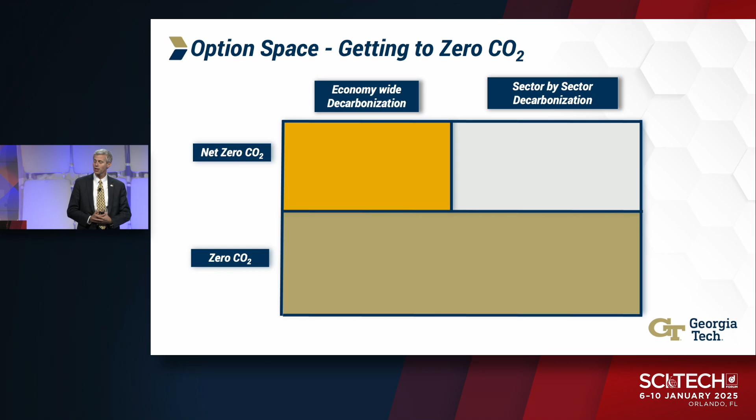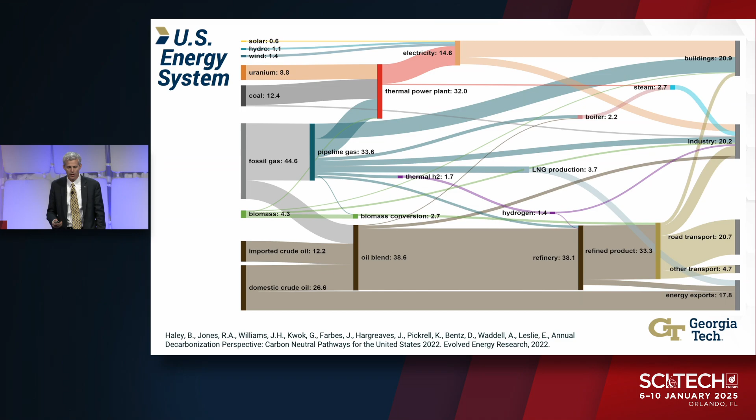If you want to think about where the commercial aviation sector fits, it's in that box right there, other transport. About two-thirds of other transport is aviation.

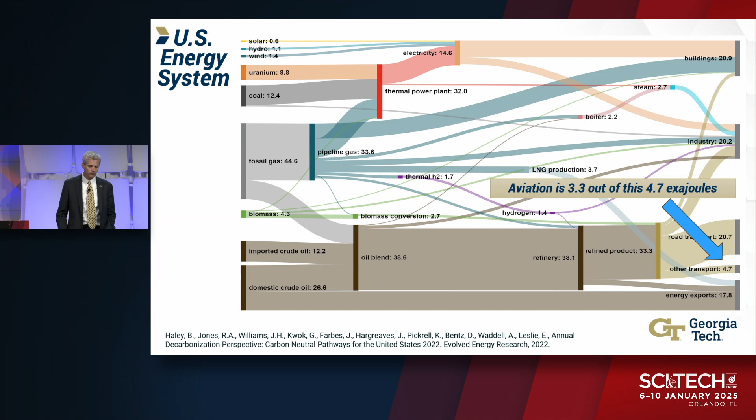So just a couple quick comments. If you wanted to sit back, squint, and ask what are the big buckets—what is this thing if you reduce some of the spaghetti? Again, we have energy sources on the far left and energy users on the far right. It's very important to emphasize there's another multi-trillion-dollar sector, which is how we're moving energy around—the energy carriers and energy storage systems that make this thing work.

We have two major energy carriers. One of those is electricity. One of those is fuels, lots of different energy sources. And if you want to just fill in rough numbers of the U.S. energy system today, these are the numbers. You can see far and away fossil fuels is the biggest source of both where energy is ultimately sourced from, roughly 90%, but also the way in which we move energy around and also the way in which we store energy—the Strategic Petroleum Reserve, the natural gas pipeline system, 2 million miles of natural gas pipelines, a massive battery, right?

Fossil fuels are actually doing a lot else. The reason the numbers are different on the left and right side for fossils is just thermal conversion efficiencies. But what you can see is that roughly we're running in an 80-20 split with the current U.S. energy economy as a whole, which means that we use fossil fuels roughly as 80% of the means by which we move energy around and store it.

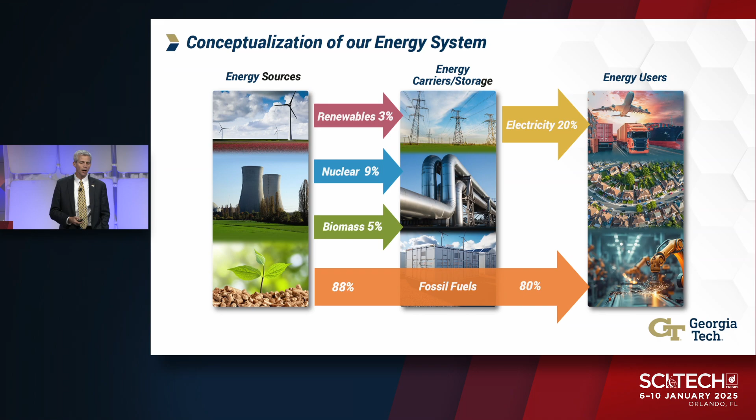And we use electricity as our carrier for the other 20%. So just a couple comments about that. First of all, it's somewhat obvious, but I want to emphasize it: these are multi-trillion-dollar sectors. As we're thinking about the evolution, it's important to recognize the interconnectedness of all this. For example, the aviation sector is leveraging, is contributing technologically to, but also benefiting from infrastructure of huge existing industrial sectors—oil pipelines, an oil refining industry, and so forth.

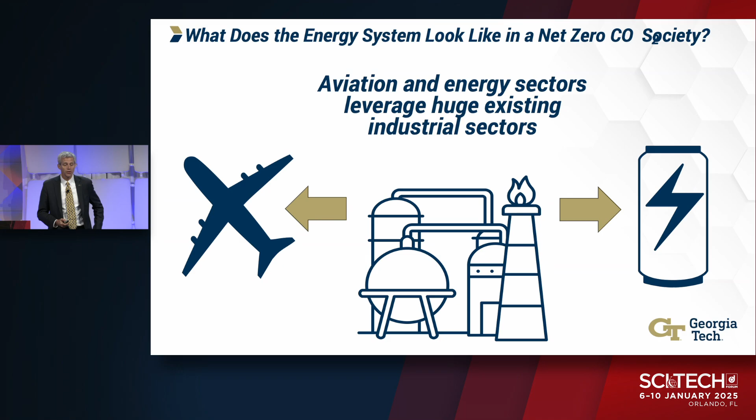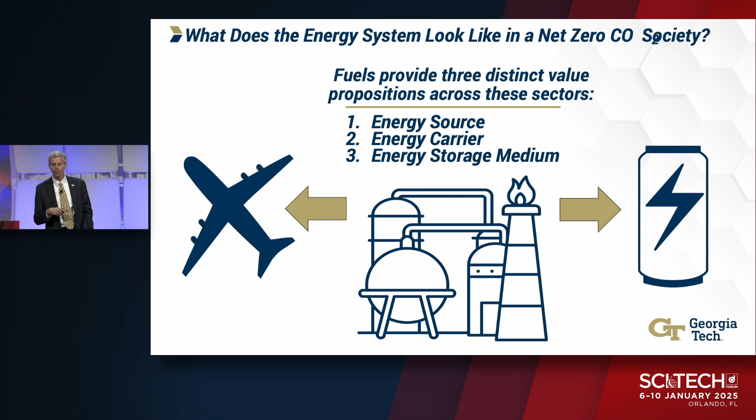The other piece, which I mentioned before, is we think about particularly the fuels, which is the biggest bar—90% of primary energy sources, 80% of carriers. Fuels aren't just energy sources; we're used to thinking of fuels as energy sources, but fuels are actually doing three things to our economy. They're energy sources, but they're also means of moving energy around—they're energy carriers—and they are also means of storing energy. So a very important point as we think about the future is that those three different value propositions are increasingly going to be separately differentiated, and they're becoming separately monetized.

So what do I mean by that? Today when you buy a gallon of gasoline, you're getting three things. You're getting something that stores all that energy—your car can sit there for a week, for a month, and it still has what it has. It provides the motive power to move your car. You're not used to thinking about what you're paying for the energy source part versus the energy storage part. But increasingly, those are going to be differentiated.

A simple example would be sustainable aviation fuel. The ultimate energy source might be solar energy. So your ultimate energy source could be solar, and then you would use a Fischer-Tropsch process, for instance, to make an e-fuel. That liquid fuel would then be your energy carrier and energy storage medium.

By separately monetized, what I mean is, again, when you buy a gallon of gas, you're buying a gallon of gas, but there are going to be different players along that spectrum making money in different ways. Increasingly, what we'll see is different technologies and systems competing for providing those services. You can have solar and wind as your primary energy source, or you can use fossil fuels with carbon capture as your primary energy source.

In terms of how do we store energy—well, you can use batteries, you can use compressed air, you can make a liquid fuel, you can make a gaseous fuel, you can make hydrogen. There are a lot of very interesting dynamics in this world as these different value propositions are becoming differentiated, as we're watching in real time.

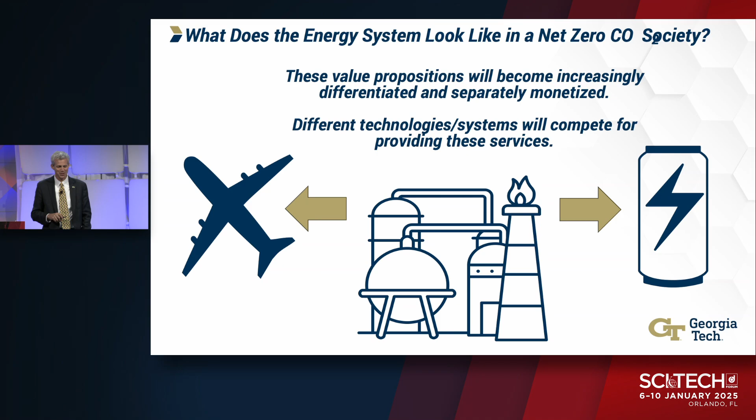Okay, so let's try to envision—and don't look at this diagram yet because I don't want you to be distracted, I should have had a transition slide—what might this world look like in a world where we've zeroed out our carbon emissions? What might this world look like?

So we can tackle this problem as engineers. In fact, there's a large community that exists today, macro energy systems modelers, that try to tackle this question. What they've done is a very sophisticated job of essentially modeling, let's just say we're talking about the United States, the US energy system. And this is like CFD. You can't just sort of average things out, right?

You have solar energy here, you have wind energy here, you have pipelines there, you have oil here, you have natural gas there. You have demand centers concentrated in cities. The stuff's all got to get connected. You got to do CFD not only in space, because where this stuff is and how it's getting moved around is spatially heterogeneous, but also in time because, in particular, in the electric power sector, you've got to make supply and demand match every instant of time.

So it doesn't matter if you've got a lot of power during the day when you need it at night. You need either a battery to move it from day to night, or you need a way of generating power at night. And so anyway, large communities are putting together these models that try to capture all of these features. And once you've got a reasonably high fidelity model of what this energy system looks like, you can then wrap an optimizer around it, right?

You can say, hey, this is what we have today. What would it look like to get me to some future state? And you can constrain it in different ways. For example, the way a lot of this optimization works is get me there in a least cost manner. So you have to have a model of cost, and obviously there's assumptions with all this stuff. You're modeling cost curves. You're modeling how fast solar and battery costs might drop, how big the biofuel resource is before you start really crimping food costs and things like that.

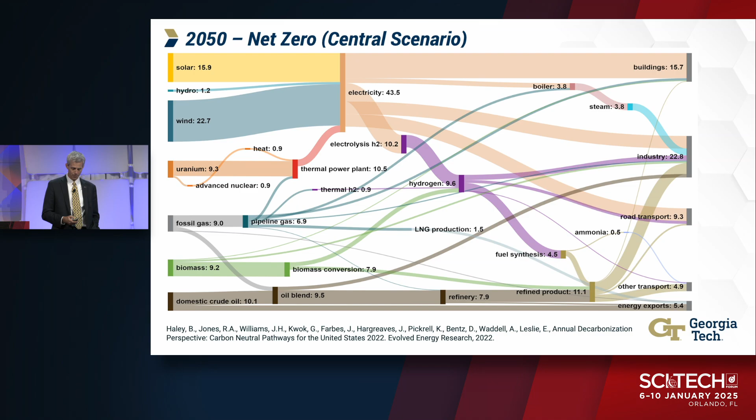On the right, you see your users, and then lots of stuff going on in the middle. You see a big purple hydrogen, which wasn't really there before. You see fuel synthesis, which is synthesized liquid fuels as opposed to using fossil fuel. You see ammonia, etc. So if you kind of squint and say, where is aviation on this? Well, aviation is about 3.1, about 2/3 of that other transport sector. Also very interesting is that the fuel split of this least cost model is not 100% SAF. It's 50-50, fossil fuels, renewable fuels.

If you want to say what's a least cost way for our society to get there, saying aviation should go net zero versus saying how should aviation best support a least cost societal net zero target, you end up at a very different answer. In particular, you're still burning. And it makes sense, because it's going to be a whole lot cheaper to manage your CO2 emissions from something sitting on the ground, potentially right above a depleted oil reservoir that you can just pump the CO2 back into, than trying to manage something that's flying around and has to deal with all the safety issues of aviation.

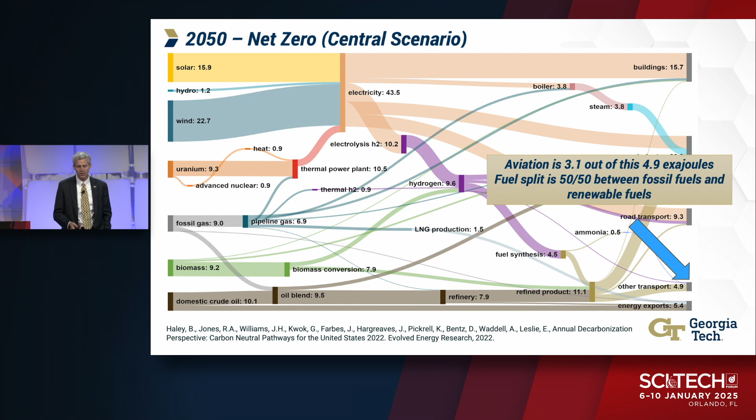But again, demonstrating my point that you get a very different answer if you think zero CO2 versus net zero CO2, and a very different answer if you think sector by sector decarbonization versus society as a whole. All right, so if you sit back and squint and say, okay, what are the macro numbers? Here's where they are. You see your energy sources on the left, so big growth in renewables, 55%, and big growth in biofuels, biomass there, but what you also see, like I said, fossil doesn't go away.

Fossil's still about 20% of primary energy sources, and then the whole idea is then you're utilizing other means to manage and capture, or go negative, essentially go negative carbon. On the right side, how is energy moving around? So remember, our current energy system is 80-20. 80% is moved via a fuel, 20% is moved via electricity.

You see this least cost world is a 50-50 world. 50% of energy is moving around via electricity, 50% via a fuel. So big growth in electrification, going from 20% to 50%. Lots of opportunities and technology needs and R&D around power electronics and high voltage motors and batteries and energy storage. That's motivated by that. But I want to again emphasize, it's not 100%.

And there are groups that are essentially saying that we need a 100% electricity world where fuels aren't utilized at all. And that is a possible world. You can do that. It's just a lot more expensive. And so this least cost world is a world where it's 50-50. What's also interesting about this 50% fuels is it's further split. Half of it is fossil. The other half is synthetic fuels, fuels that you manufacture: hydrogen, sustainable aviation fuels, ammonia, et cetera.

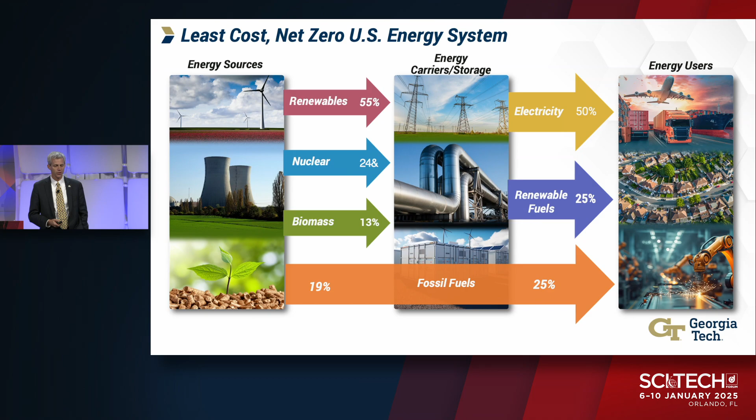And so a very large new sector, I won't say completely new, but in terms of getting there, for this renewable fuel sector. So that's the United States. So I've shown this to a few international communities and they're like, okay, whatever. This is the world. So this is a model, some of the more recent numbers from the International Energy Agency, IEA, where they've tried to do something similar, where they, again, grid up all the different countries and map these things out.

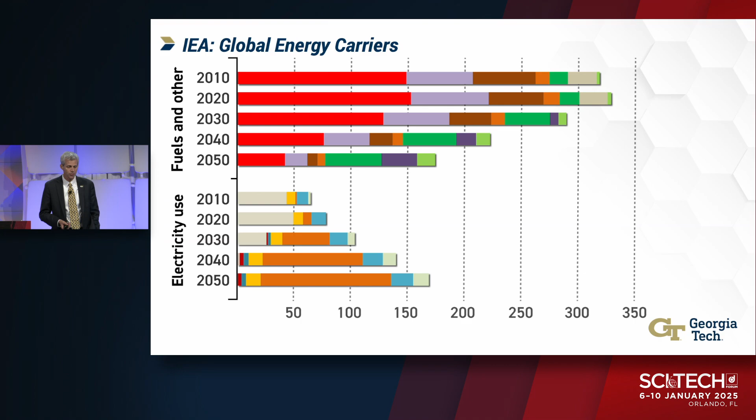And what you see here is the top set of bars is fuels. The bottom is electricity use. It shows current numbers, 2010. And you see this split between electricity and fuels. But if you flash forward to 2050, again, this least cost world, you see those bars are about the same length. So equal contribution of fuels and electricity. But again, emphasizing that the role of fuels is changing. Significant reduction in the use of fuels as primary energy sources, and a world now where the primary value proposition of a fuel is a means of carrying and storing energy.

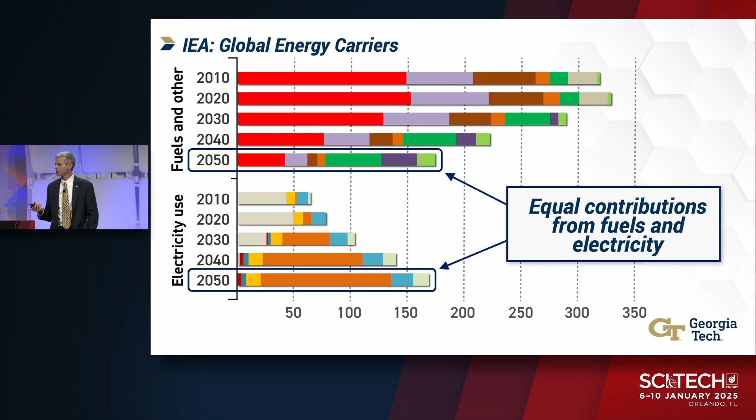All right. So this is my transition slide. So that was kind of my macro societal view. Let's think about what this might mean, and then I want to dive into the weeds on some specific technology problems. There's a lot of really interesting technology questions that pop out of this. And I'm going to emphasize some of the technology drivers in areas that many of you work in and that I work in. But first of all, things like thermal efficiency continue to matter a lot. The Brayton cycle, the rotating detonation engine, whatever it is.

If you just think about this world where 50% of the fuels are sourced synthetically, and I can tell you, as much as we're going to try to drive down costs of synthetically produced fuels, it's going to be really hard without a carbon tax to get it at parity to a fossil fuel. I'm just saying. We can have all these wonderful goals to try to get hydrogen or sustainable aviation fuels less expensive than a fossil. It's going to require policy levers, carbon taxes or tax credits or things like that.

But what that also means is there's going to continue to be a premium on thermal efficiency, potentially even a larger premium, where today the significant cost of operating an airline is the fuel, significant cost of operating an electric power utility is the fuel. And if we think about these fuel prices, thermal efficiency is super important. Operational flexibility, very, very important. And what I mean by this is the ability of your system to operate at low power, high power, operate with quick transients and things like that.

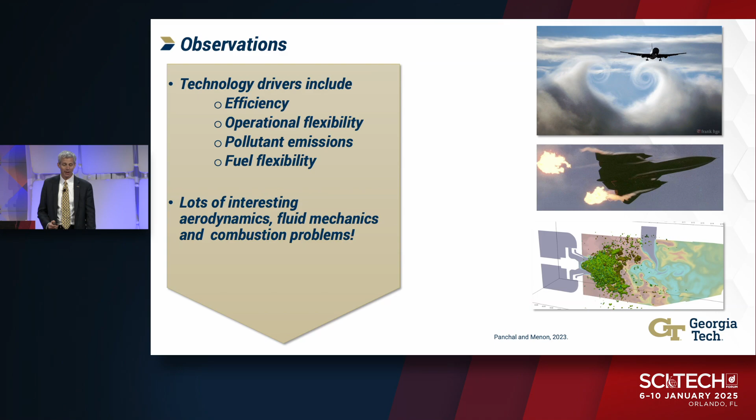So bottom line is, this is a world where there's a lot of really cool problems, and what I want to do in the rest of this talk is zero in on some of the work I've done, and drill down on some of these more detailed issues: fluid mechanics, some of the canonical problems in fluids, how combustion starts to influence those, and a whole other set of issues with flame dynamics and then combustor system dynamics.

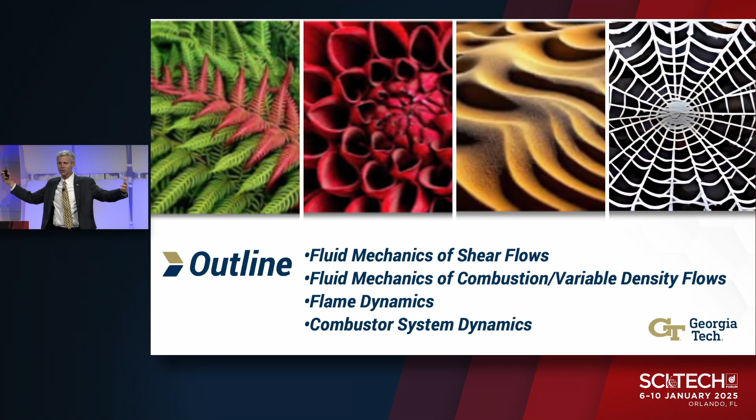The way I've structured the rest of this is to emphasize the way in which nature in our aerospace applications naturally likes to organize itself into really interesting patterns, which flow all the way up into system level issues around our overall emissions and climate impact. And again, there's lots of other problems that are really interesting and important.

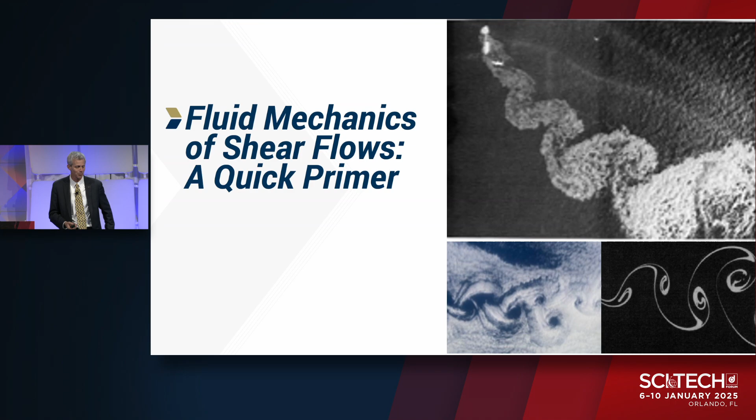I've just used ones which I'm most familiar with for the rest of this. So let me just quickly talk, as a quick primer, to remind ourselves of a couple things around fluid mechanics. And I want to talk about internal flows, like flows inside of a combustor, because that's what I can talk about with the easiest. And so on the left we have a mixing layer, in the middle we have a jet, and on the right we have a wake, all very important canonical geometries for internal flows.

And what I really want to talk about is vorticity. So the red overlay shows you where the vorticity is. Remember, vorticity is the velocity gradient. And it just shows you where the vorticity is in these flows. And where's this vorticity coming from? If we have a homogeneous uniform flow, you're not really making new vorticity in the flow. Rather, what's happening is vorticity is originating from all those no-slip boundary conditions, all those walls. And you're making vorticity, and then it's getting flushed into the flow.

And it's a little bit like if you imagine having a dye, a streak line, for instance, where you're just injecting a dye into the flow, and you say, what happens to that dye as it evolves? Well, if it's just a dye, a flow without any shear, nothing really interesting. It just convects downstream and it gradually diffuses. So essentially that far left image is a little bit like a dye. You're injecting vorticity into the flow, and what happens to that vorticity? Does it just go downstream and diffuse, or do more interesting things happen?

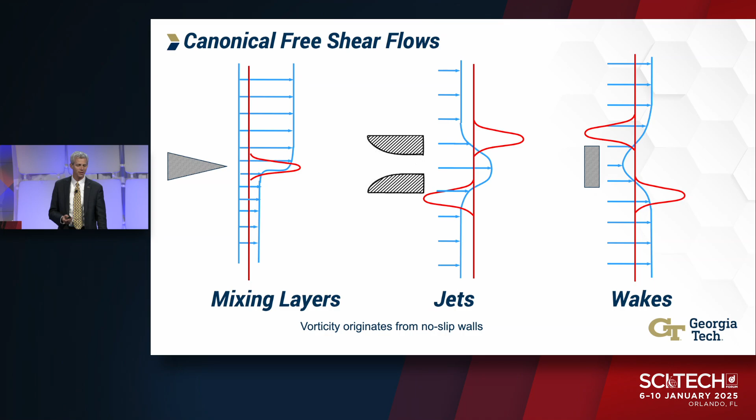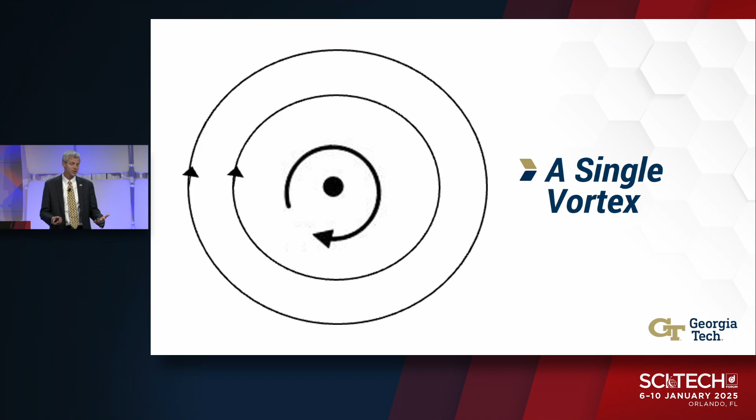Well, to answer that question, I want to talk a little bit about how vorticity interacts with itself. So if we start with a single vortex, here's what I have here. This black dot denotes a single vortex, and it just spins. That's what a single vortex does. But the moment you start getting multiple vortices, interesting things start to happen. So if I have two counter-rotating vortices, the right vortex is inducing a motion on the left one. It's pushing it down. The left vortex is inducing a motion on the right. It's pushing it down. So these two vortices are actually going to translate.

They're going to convect. So if you've ever taken a canoe paddle and been in the water, and you move the canoe paddle through the water, you will see this. You'll see those two vortices formed at the edges. If you lift your canoe paddle out of the water, you'll see those two vortices continue to translate and convect through this exact phenomenon. Well, all right, let's make this a little bit more interesting.

Suppose I take a linear array of co-rotating vortices. Each white dot here denotes an individual vortex, and I've just drawn a black line through them just so you can see how they're connected. And this problem is motivated, it's not the same thing, by this sort of shear layer profile here, where you have that jump in vorticity in the middle. Again, each one of these vortices is inducing a motion on each one of the other ones, and if you just leave it like this, it'll stay like this, and it'll just diffuse downstream and nothing interesting happens. But it turns out that this configuration is unstable.

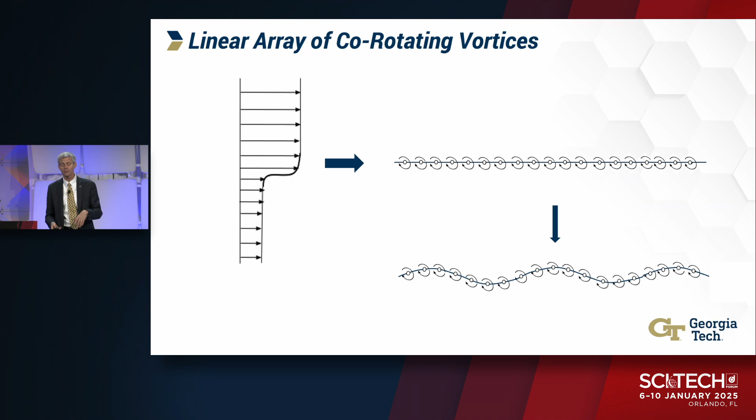So what happens if I just take these vortices and I perturb them a little bit? What happens to these things? How does it influence how they interact with each other? Turns out that this was a problem that was looked at by Rosenhead in 1931, and I'm just reproducing their results, which shows you how it happens. Again, each one of those white dots is the vortices, and as you watch this thing evolve, what you'll see is these things start to move. They start to move relative to each other. They start to concentrate. They start to roll over on top of each other.

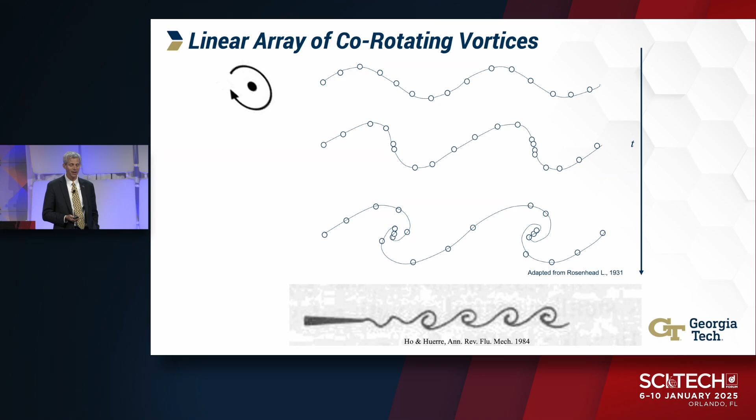And so if you just aggregate or add up the total vorticity in the flow, it hasn't changed. It's just organized itself. It's concentrated itself. And this looks a whole lot like this nice picture from Ho and Huerre from Annual Review of Fluid Mechanics. And this fact that shear layers don't want the vorticity to remain diffuse and spread out, they like to concentrate that vorticity, we call that the Kelvin-Helmholtz instability, which is ubiquitous in nature. And here's just a couple images. Cloud pattern in the sky, the classic Brown and Roshko image, just showing the way that vortices naturally want to organize themselves and concentrate themselves.

This has order one influences on essentially every problem that those of us in this room are interested in. It's because this organization of vorticity into these large-scale structures plays such an important role in how things mix, and acceleration of mixing in so many important combustion, gas turbine, aerospace, and aircraft engine problems.

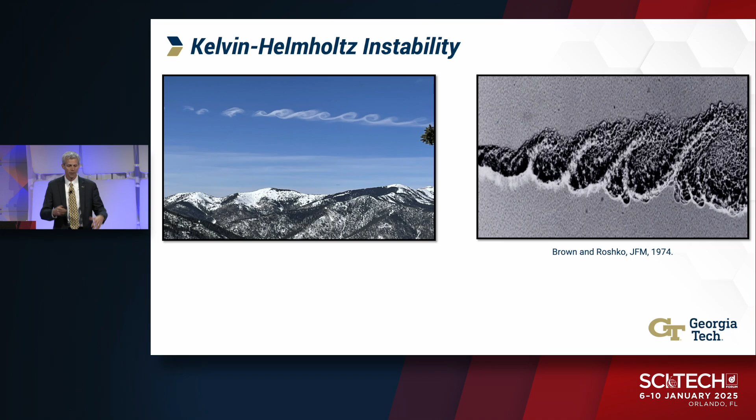Let's make this a little bit more complicated. Let's do two linear arrays of vortices now. The white dots are vortices rotating in one direction, the black dots are vortices rotating in another direction. The line is just drawn there so you can see where they are. This isn't the same thing, but it's motivated by the problem of a wake. In a wake, you have these two vortex concentrations of the flow separating off of the two sides.

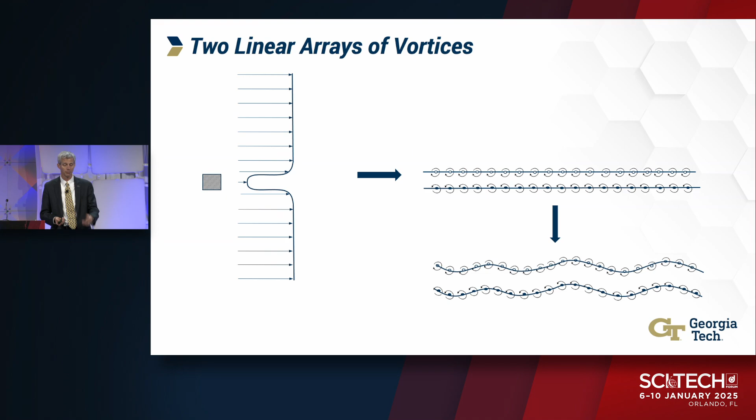What happens if you perturb this problem? This was looked at in a 1962 JFM paper that I have here. This shows what happens as you march this thing down in time. What you see is this configuration is unstable. If you go to the bottom image, all those dark vortices have clustered together, and all the light vortices have clustered together.

They're staggered, and you see something that looks a whole lot like what we call the von Karman vortex street, which you'll all be familiar with, and which again is ubiquitous in nature.

What's happening here is you have this vorticity wanting to coordinate and concentrate. Then you can start looking at more and more complicated flows that look more like things we make thrust vectoring devices with, or that we mix fuel and air with, or that we use to cool off airstreams.

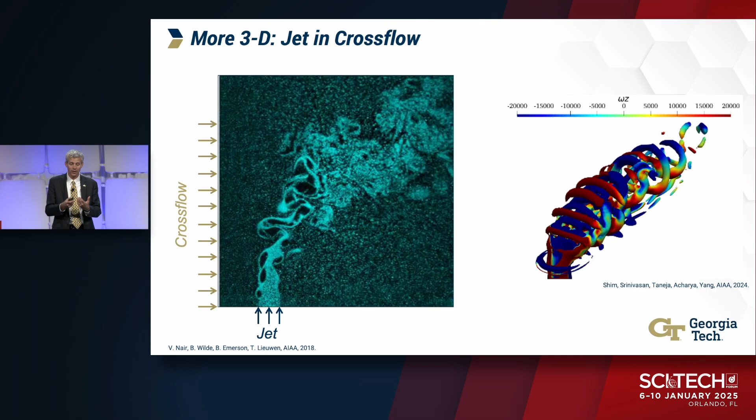For example, a jet in crossflow is much more three-dimensional, but again what happens is these vortices don't just go everywhere. They like to concentrate, they like to form patterns. In this case, you get some very classic organized vortical structures.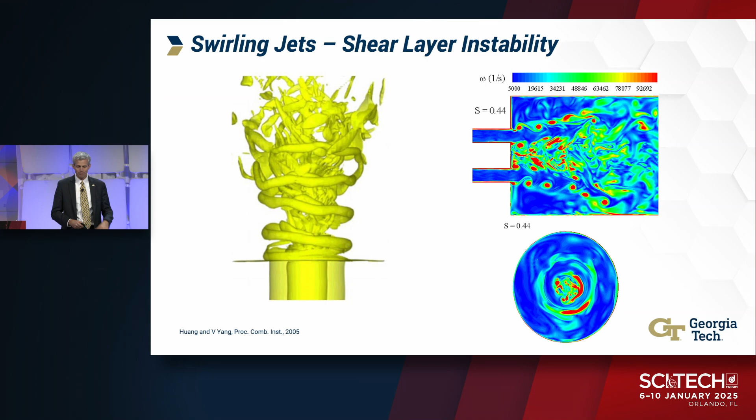All right, so that's kind of a baseline. Now, if we start thinking about what happens if we add variable density, if we have hot and cold streams, or if we add combustion, this is the only equation I'm going to show you. Combustion influences what I just showed you in different ways. It can accelerate the flow, it can stretch vortex lines, making them more intense, and it can bend them. The flow dilatation is a really important one.

Just like an ice skater, if they move their arms in or out, they spin faster or slower, combustion does that. It makes vortices get spread out, or you can get mechanisms for generation of vorticity like the baroclinic torque. But the main point I want to make is if we go back to this image I drew before of these two arrays of vortices, essentially each vortex is talking to every other vortex, inducing motion on them. One of the really interesting things combustion does is, imagine I have a magic membrane, which I just drew with this red line, is it influences how these things are talking to each other.

Through gas dilatation, not only is combustion a super important practical thing that we all have to deal with, but it's also a super interesting fundamental thing, because it's a knob that you dial that, depending on the gas expansion ratio, changes how these different vortices interact with each other.

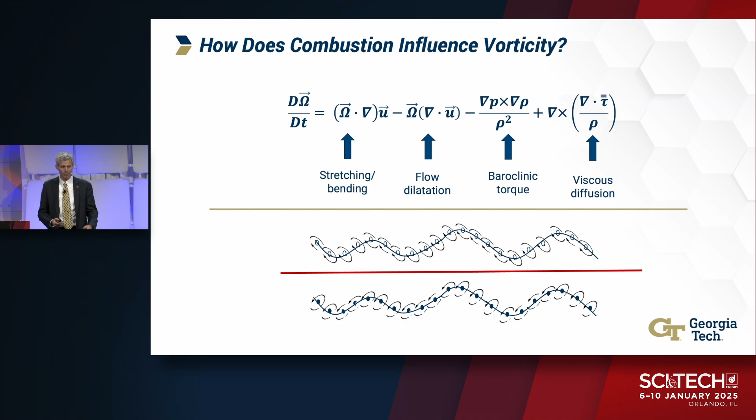So for example, this is an image from Mario Soteriou and Rob Erickson, which shows what happens if we have a wake flow. The top image is your classic von Karman vortex street. The color denotes vorticity, so you see this organization of vorticity into these blobs. It organizes itself. Then what we do is start moving down as TB over TU denotes the gas expansion, or temperature ratio across the flame. The black line denotes an instantaneous flame image.

As you start marching down, what you can see happening is you lose that von Karman vortex street. Really, because in this case, what the flame does is it starts to block how those two shear layers are talking to each other, interacting with each other. They're still unstable, they're just unstable in different ways.

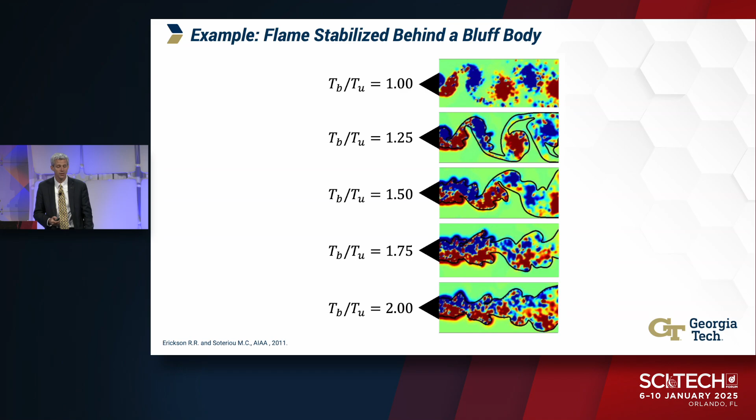Or this is another image, this is from my colleague Ben Emerson at Georgia Tech. You're looking again at a video. This is experimental data of a flame. The top right is a spectra, a Fourier transform of how much the flame is flapping around.

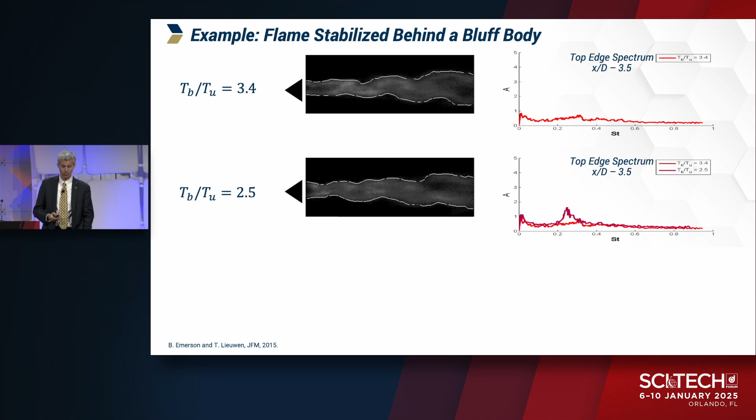As we move to lower temperature ratios, so a temperature ratio of 1 essentially being isodensity, notice how that peak pops up in the spectrum. This is not an acoustic tone. This is just the natural von Karman vortex street, Strouhal number 0.2 type tone that happens because these shear layers are interacting with each other.

So this gas expansion ratio is super important from a practical point of view, because if you can imagine, if you're running an atmospheric pressure flame like your home water heater or a boiler, you've got air at 300 K. When you burn it, it's going to pop up to maybe 1800 K—gas expansion ratio, or temperature ratio, of 6. Big change in how you're influencing vorticity.

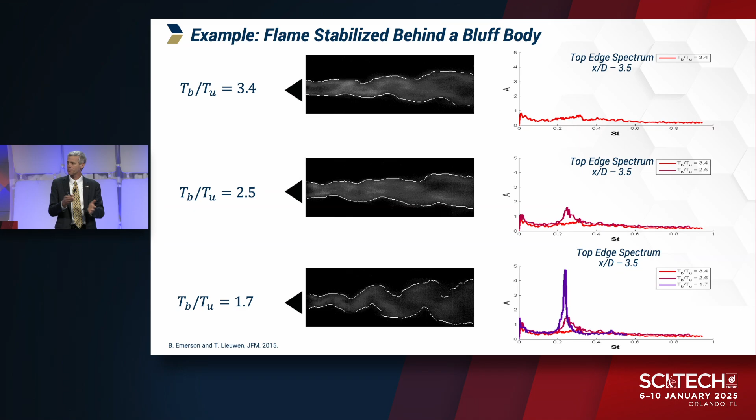If you think about an afterburner, an augmenter, a thrust augmenter, air is already coming in really hot. You might only bump up the temperature by 1.7, maybe 2, starting to look much more isodensity. If you look at the main combustor in a gas turbine, it's come through the compressor, it's hot—you might have a temperature rise of 2.5. So you get very fundamentally different regimes of how these fluid mechanic instabilities manifest themselves in these different types of environments based on this gas expansion ratio.

Then, again, this is an image of a combusting jet in crossflow. So here we have a fuel jet and air, and they are burning. What the orange denotes is an instantaneous shot of the OH radical, and you can see the flame and the flow talking to each other and interacting with each other.

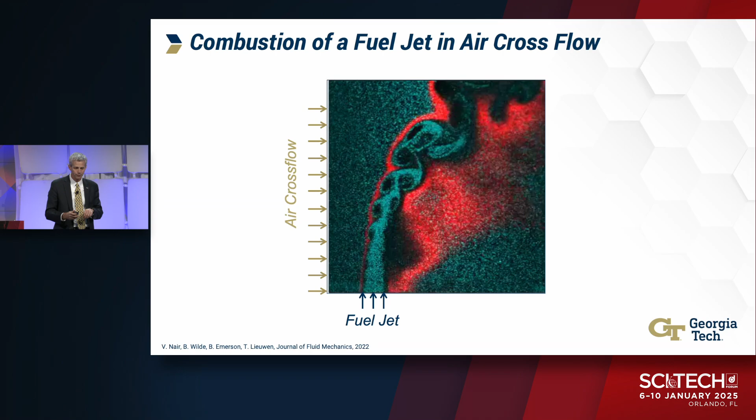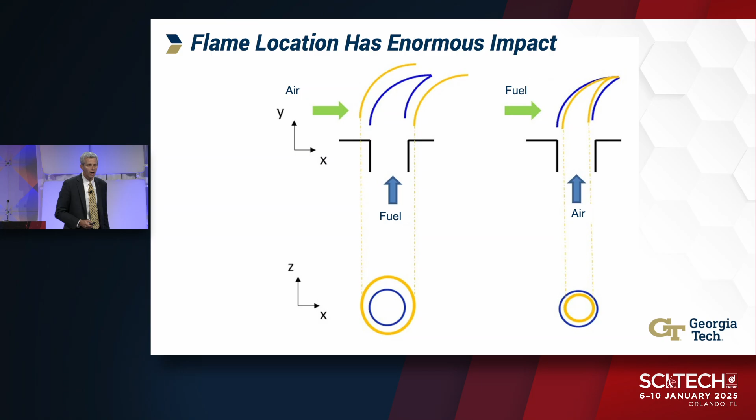So the top left might represent a configuration like what's called axially staging in modern, really high efficiency gas turbine power plants on the ground, for ground power—you might have this configuration. Whereas the top right might look more like the quench section of an RQL combustor, where you're basically dumping air into a fuel-rich crossflow. So that's just a couple examples of how the flow naturally organizes itself, and how combustion changes that organization.

What I want—and I'm going to start moving faster because I'm going to wrap this up in a minute—but what I also want to emphasize is that in addition to the flow, the flame has its own dynamics. The flame is doing its own thing. So what I have here is an image of a bluff body stabilized flame. If you have a flow and you have a flame, you'll get a flame that spreads off of that.

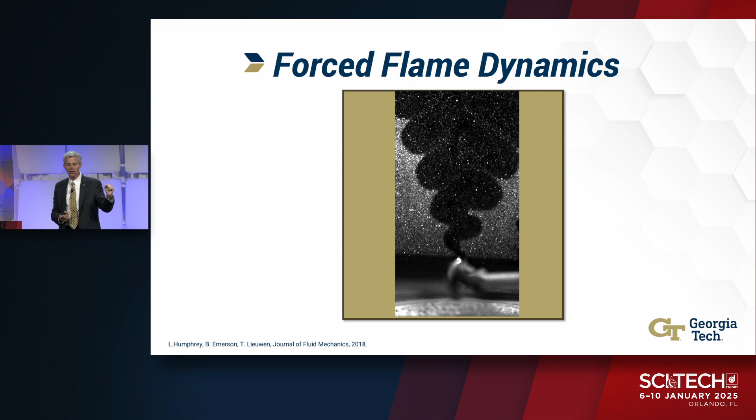What we've done is we've just shaken that bluff body from side to side. You can see you're creating these wrinkles on the flame. These wrinkles are convecting downstream, and they're evolving as they convect downstream. So the flame is doing its own thing, and that's interacting with the flow.

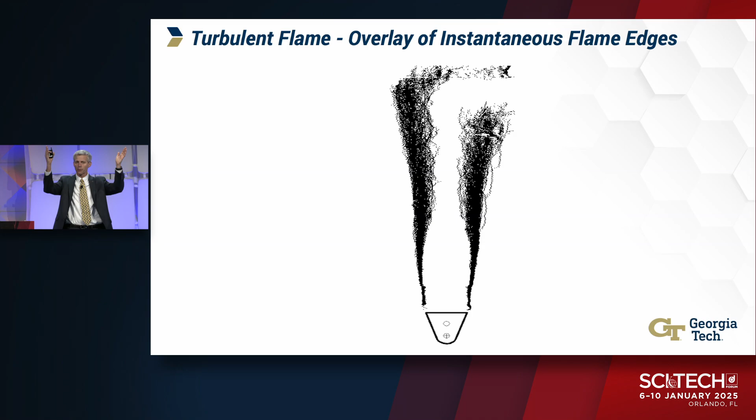One really interesting thing: if you look at a turbulent flame, flow's going bottom to top, and you draw a whole bunch of instantaneous images of where the flame is, this is a pretty typical picture. You see what we call the turbulent flame brush, where the flame occupies a wider and wider region as you go downstream—sort of like a turbulent diffusion process. The flame's getting knocked around more and more as you move downstream. At the bottom, it's not moving around much because it's attached, it's anchored.

In many of the problems we think about, where we have these natural instabilities or natural self-organization, we have harmonic forcing on top. So this is an image, same geometry, where we have harmonic forcing.

What we can do is, if we look at the right where I've overlaid all those instantaneous flame images, you see a different picture. You see the amount of flapping the flame is taking gets more, and then it actually gets less. That's kind of weird, because if you're modeling this growth and where the flame sits as a diffusion process, that would imply maybe negative diffusion or something. So that's clearly not what's going on.

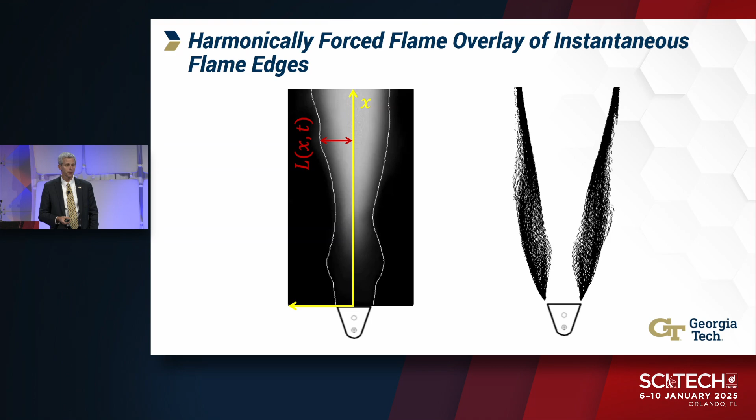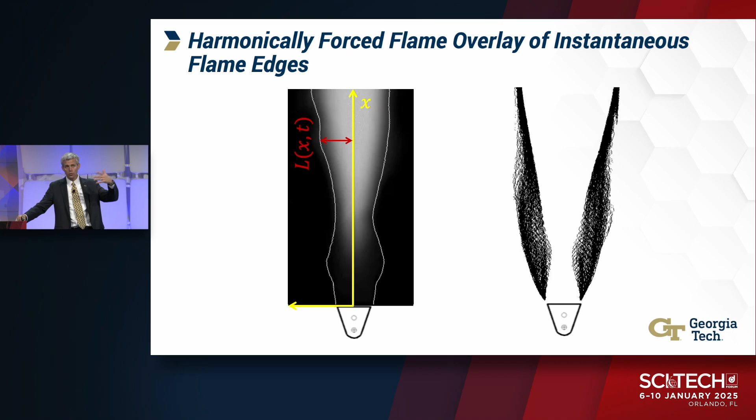We can be a little more quantitative. If we grab the instantaneous flame position, we call that L, shown here in red. L is a function of downstream distance x, and it's a function of time. You can actually cook up a simple model—this is the only other equation I'll show in this talk—a simple model of how these periodic convecting disturbances interact with the flame.

When you perturb a flame, whether with an acoustic wave or a convecting vortex, that interaction actually creates new length scale disturbances. It creates interference patterns, controlled by how fast vortices move versus how fast waves on flames move. Flames have their own dynamics—they support waves that propagate on them. If a vortex is not moving at the same speed, you have two periodic disturbances moving at different velocities. Some points are in phase, some points are out of phase, and you get this interference wavelength.

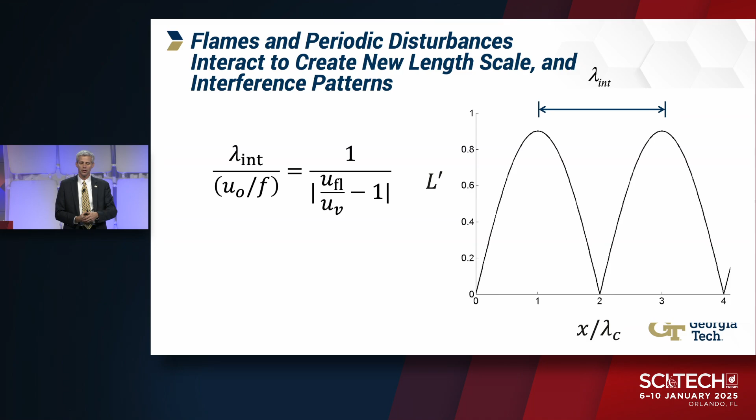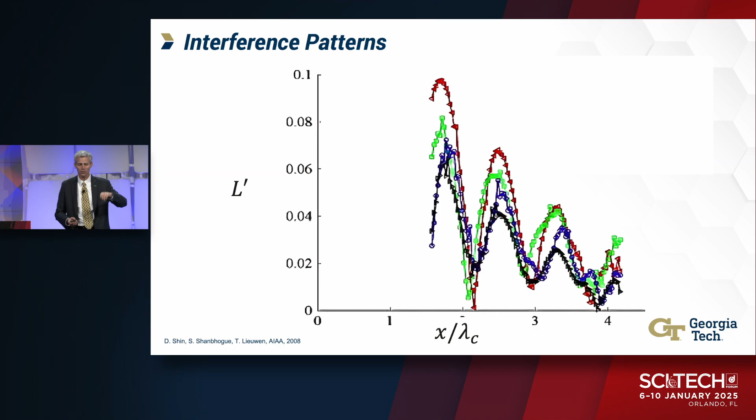We see these things all the time in flames. This is data taken by Santosh Shanbhogue at MIT of the magnitude of flame flapping as a function of downstream distance, and you see locations where it's flapping a lot and where it's not flapping much at all.

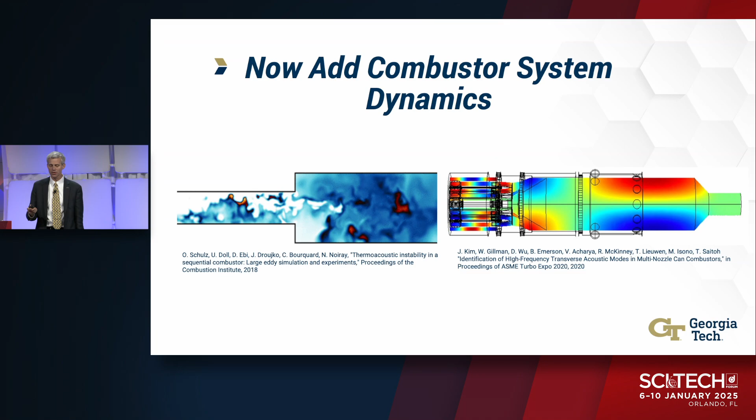The last example I want to give before I wrap up: I've talked about the flow, adding combustion, adding the flame—now add the overall system, because combustor systems have their own dynamics. Here's a really nice image from Nicolas Noiray at ETH showing some of these combustor system dynamics. The right image is work that we did, a visualization of the natural acoustic modes of a combustion system. Combustors are like organ pipes—they have natural acoustic modes. You can get lots of frequencies, not one, but many, many frequencies.

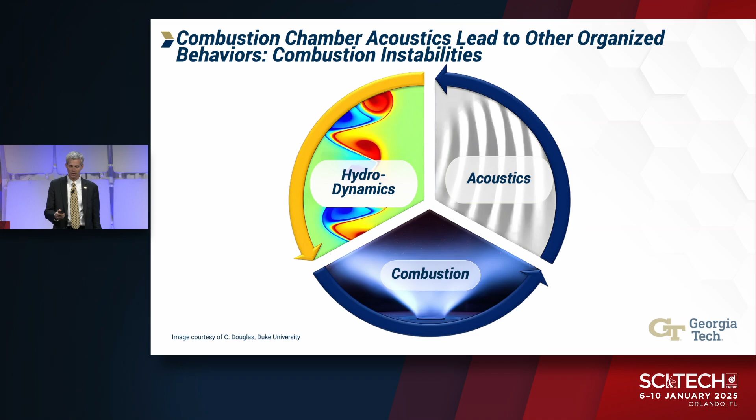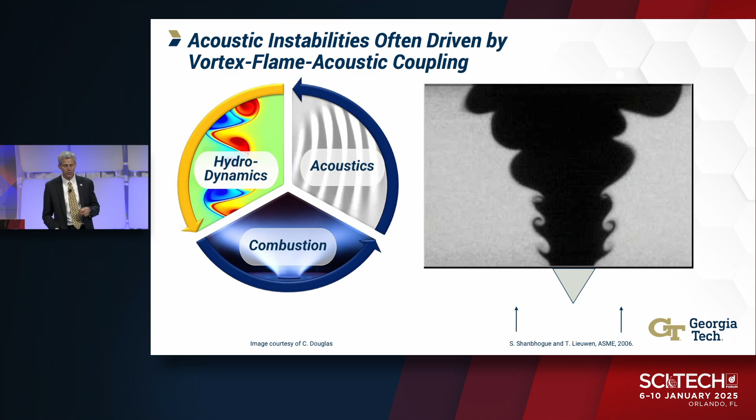They can couple. This is an image from Chris Douglas at Duke University. In many cases, flames make sound, and sound excites hydrodynamic instabilities—it excites the flame. So you get all kinds of really beautiful and fascinating, but very destructive instabilities in rockets, home heaters, and aircraft engines—we call these combustion instabilities. Again, often these acoustic instabilities are driven by vortex-flame-acoustic coupling. This image on the right is a movie, again by Santosh Shanbhogue at MIT, of a flame where you're forcing it, and you can clearly see the excitation of those vortices.

I will stop there and summarize: lots of interesting problems. A net zero economy is not what you think it is. It's not a world of 100% electrification—lots of electrification, but not 100%. Lots of fuels, lots of renewable fuels, but still fossil fuels and things like that.